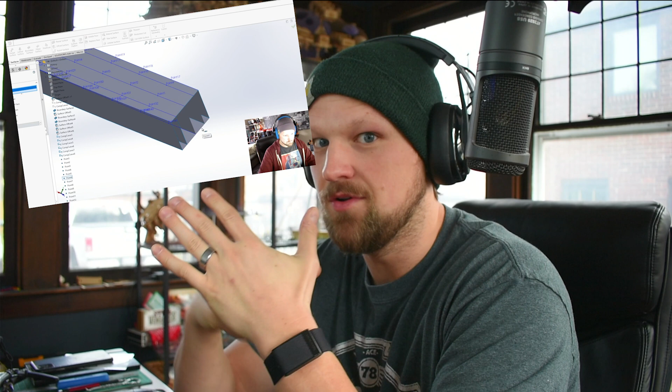If you've followed me for a while, like for 4 years, there's a video on YouTube, I'll link it in the description, of a pathetic dude spending 10 minutes to model a track piece and having to redo that multiple times. That's hilarious to me because I've learned a couple of new little tricks that we'll go over in this video on how you can enhance your design.

We're going to focus on a triangular track, since on the previous one I did the square box track in a totally different way, more heavy on Solidworks and not so much in the Excel setup. So this time we're going to be heavy on the Excel, and then we'll dive into how you can model it in a CAD program, and I'll be doing Solidworks. I think it'd be a lot of fun.

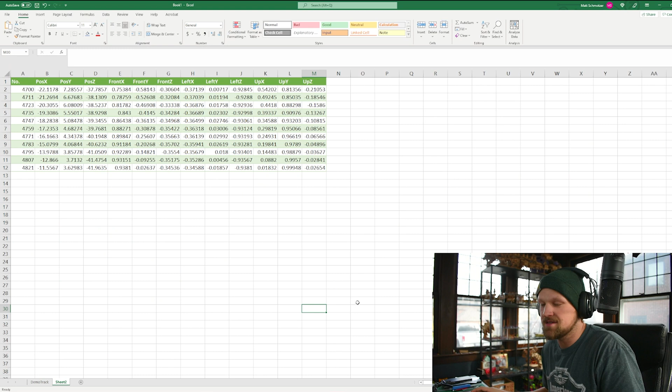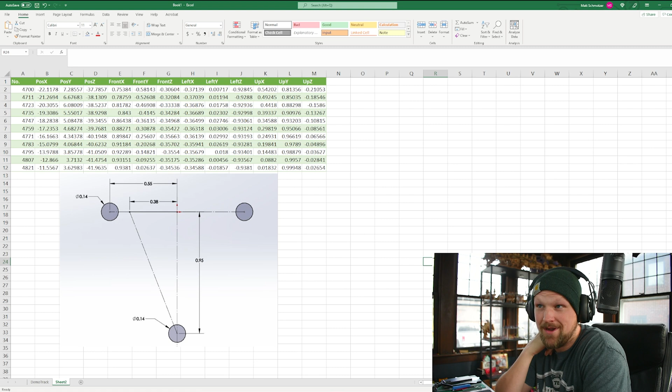We're going to dive right into it. As I said, we're doing triangular track, so I have a little diagram of what we're going to be going for today. This is all in meters. It's close, not perfect, but this is what we'll be doing. If you're going to go and model some track to be 3D printed to make a model or whatever, you can set it up whichever way you want. I'm just going to go over the procedure to set everything up, and then we will go from there.

So, like we've done in past videos, we're going to set up our rail gauge. And as you can see in this drawing, it's 0.55, so that's easy peasy.

Just like the previous video, this is gonna get kind of boring — you're gonna be like, dude, we've done this every single time, it should be the same. I'm just gonna go over it for the newbies that just came in, like, I really wanna know Intamin track, I don't really care about all your other videos, I don't have a half an hour or an hour to go and watch all those. So I get it, everyone's busy.

So we're gonna start with the left rail and the right rail. If I'm going too fast, go back an episode or two and we'll talk all about what we're doing here. For our left rail, for the X position, we're going to add our left X times the distance, which is half our gauge. We'll set that up and bring it over just like we've done before. If you've been following me for the past few videos, this is trivial.

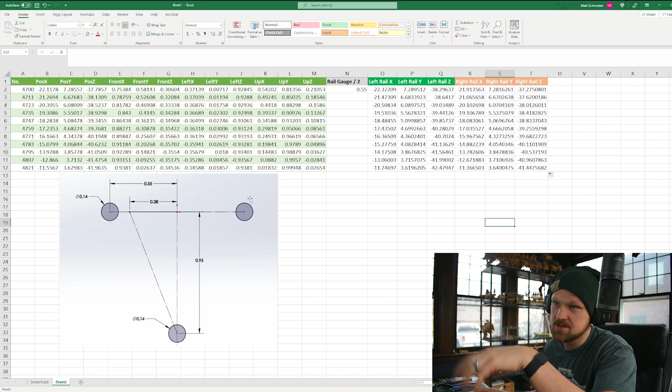Now we're going to do the right rail, same thing: X position, and we're going to subtract the left X times our gauge. Nothing new here, we've done this before, and I'm just doing this in Excel to visualize what's happening. You can program this in MATLAB or code it however you want.

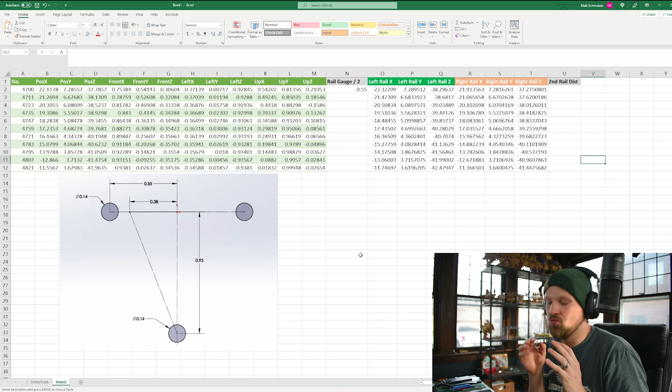Now we're going to start diving into where this gets a little different. We need to have what I'm going to call a secondary rail point. If you look at Intamin track, on these cross ties it doesn't actually go up to the rail — you can't use this same point, so we need to offset it over. I like to imagine it as a secondary rail. So do the exact same thing, you just bring it right over. The only thing different now is this distance is going to be different.

For this example, it looks like we have 0.38, so we'll set that, and then we will do our secondary rails. Let me grab our titles here — I just call it second left rail XYZ, and then we'll bring it over. It's the exact same equation, we're just grabbing our X, and the only thing that's different compared to our original left rail is now our distance is different because instead of 0.55, we're going to 0.38. That's the only difference there, and then we're doing the exact same thing.

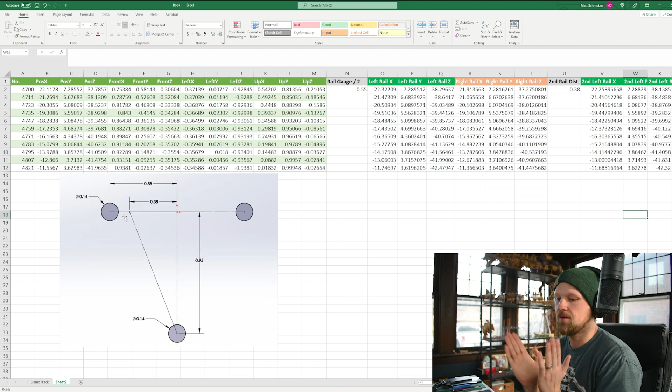So what we have now is the point where our actual running rail will be on, and then the point where we're going to connect the cross tie vertical parts of the triangle. Very straightforward.

Then we have to do it for the right side. Same thing, only now positive X minus the left X times this new 0.38 distance. We'll bring that over — everything should be pretty straightforward as of now.

Then we need just one more point for the bottom, the spine. Let's keep going over here — we'll call this spine. In my drawing that I sketched up in SolidWorks based off some Google images, I'm gonna go 0.95, that seemed pretty close. It might actually just be a solid meter, I don't know — talk to someone that worked at Intamin, or heck, this would even work for a Gerstlauer.

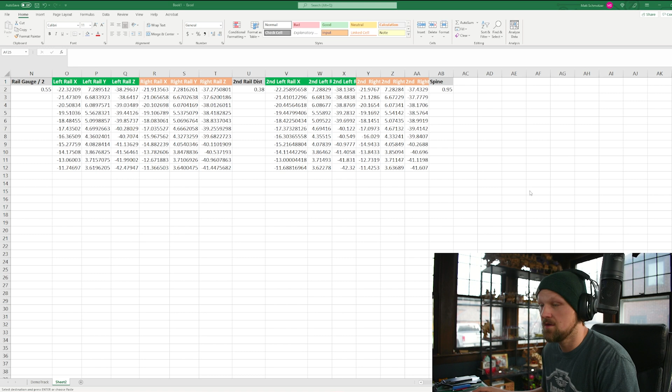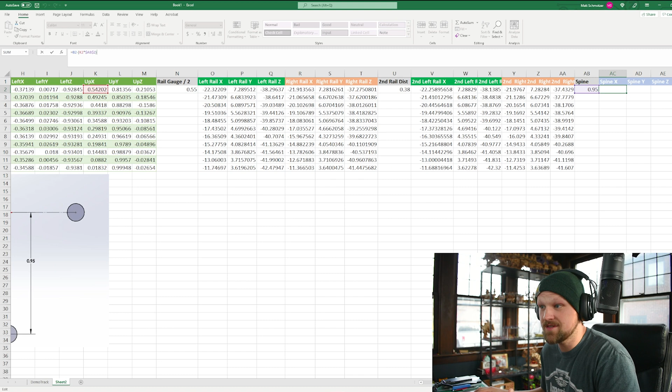You might want to change up a few things later on, but it's pretty much the same procedure. So, spine X, Y, and Z. You've done this before if you watched the last video, we're just going straight down. Let's take a look at the equation: positive X minus, because we're going down, the up X times whatever distance we said, which is 0.95.

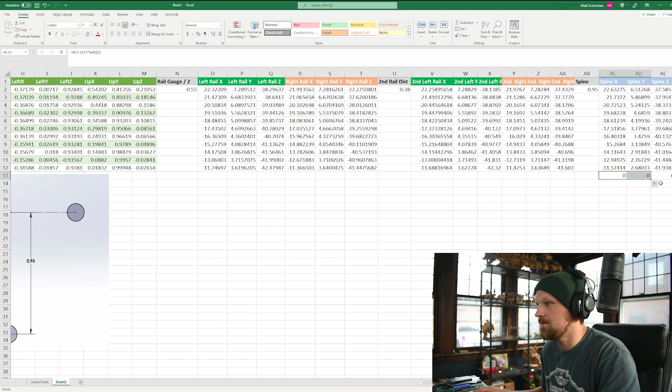Look at that. All right, and there we go. Bring it over, bring it down. Guess we don't need this last one.

So with that, you have now just programmed all the points, all the curves you're going to need to bring this into a CAD program. And that took, I don't know, a couple minutes. As you go through your entire track, you just bring it in and all the equations are set up. So it's really, really quick.

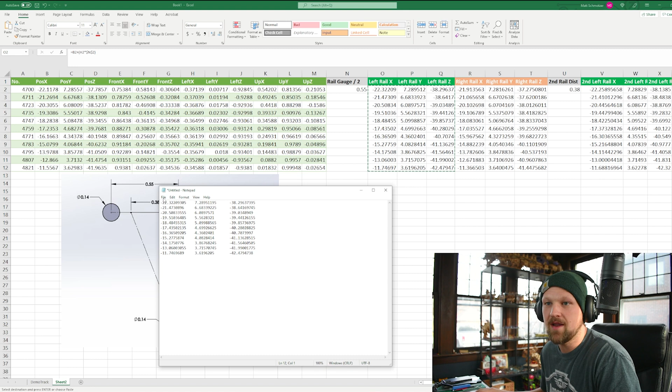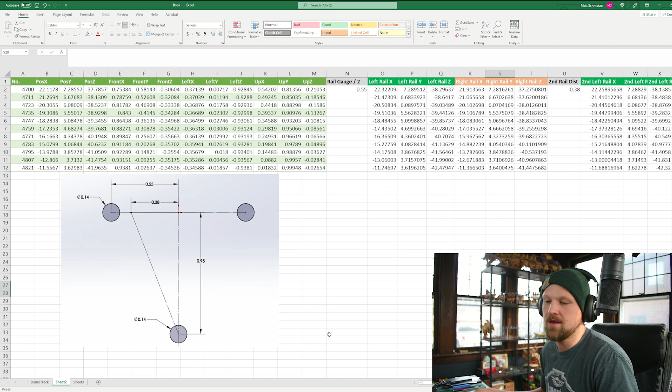Now, the next step to get it into Solidworks is you go to Notepad, grab your coordinate system like we've done before, put it in Notepad, save it as a text file. You can actually save Excel as a text file too—just bring it into a new sheet, put your points in there, and save it. There's other ways you can do that, but I've already gone and saved all these files for us. So let's just dive right into SolidWorks.

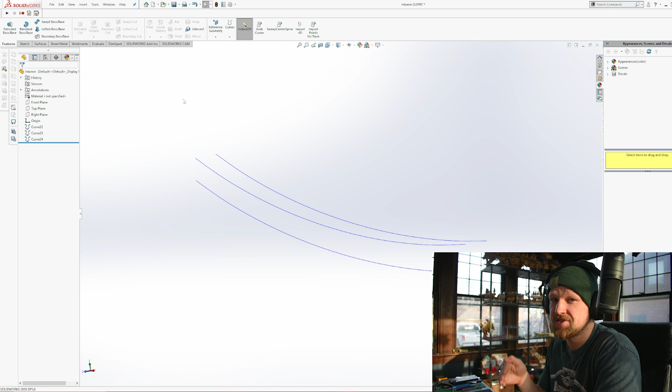Now that we're in SolidWorks, we can bring in our curves like we've done in the past. Like I said, I have a macro that we'll dive into in another episode, but all it's doing is bringing in these curves using what we talked about last time about how you can take your X, Y, and Z points and create a curve from those. So that's the left rail, the right rail, and our spine.

Then what we need to do is bring a point cloud in. The point cloud is basically our secondary, secondary left, and secondary right. Let's do that right now—bring in our points, and there you go.

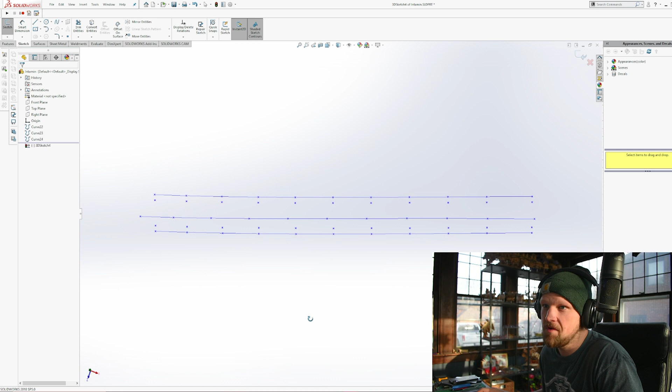We're going to use this to construct the triangular piece, basically the connector between cross ties. If you look at an Intamin track, on some of the older ones at least, there are square tubes that form the cross tie, and then there's a circular tube that acts as a cross tie connector.

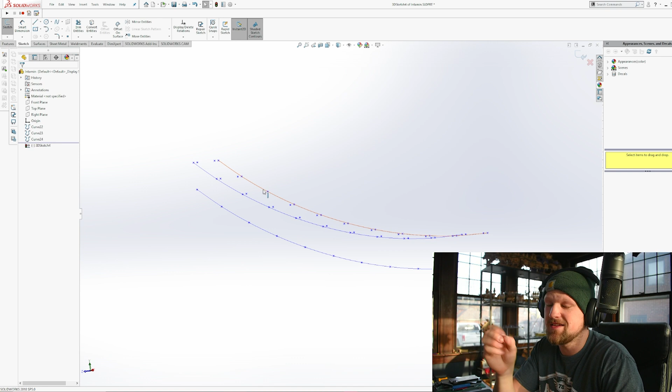So let's dive right in here. Since we're in a 3D sketch, we're just going to start making cross ties. There is a way to automate this by knowing which points are connecting each other, and that kind of takes the design to a whole other level. So let's just sketch this all out and then go from there.

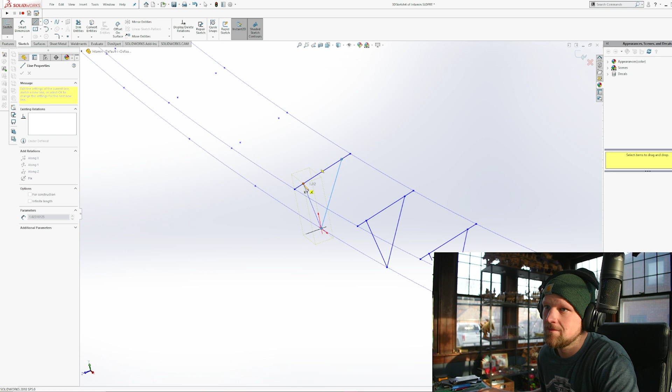All right, there we go. Those are the cross ties. So let's get out of the sketch—we're going to do weldments to create the cross ties, at least in this example.

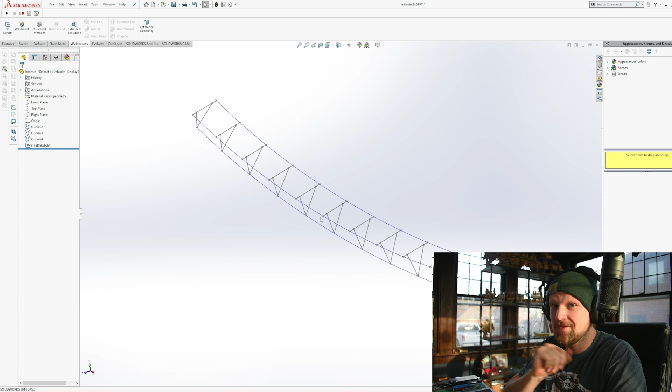Before, in episode 2, you saw me take a surface between the two curves and just pattern the cross tie. You can do that. This one's a little more prescribed to the Excel data that we had, so both ways work just fine. For this, you'll get a better result.

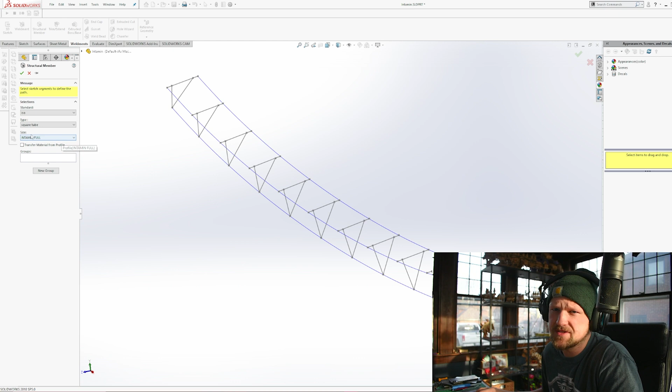So we're going to go into weldment, structural members, and I created a profile. If you go online, you can search how to make a weldment profile, but basically it's just my square tube—I just called it INTAMIN FULL. We're going to use this and just start selecting our cross tie.

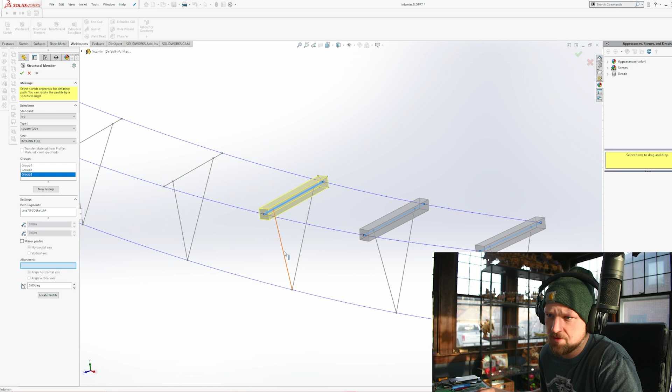As you can see, it'll load right up. What we'll do is just align it to these guys, go one by one, and make sure we get it all set up correctly. All right, there we go.

So now we have our cross ties, and then we're going to go and do the V's—similar way here. So we got our cross ties.

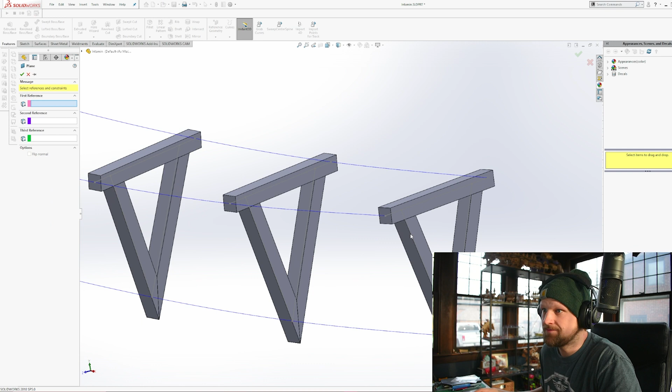Now what we're going to do next is a bit, I don't know, kind of up to you on how you want to model it. First, we have our cross tie that's at the beginning—it's obviously where the two track pieces butt together, so I'm just going to cut it in half. You can set it up however you like, but for this demonstration we're just going to cut this guy off, then do the same for the other side, and work from there.

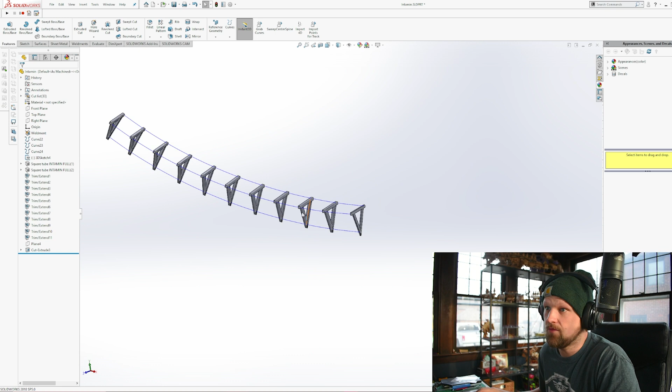So let's do the other one—just make a plane and cut it.

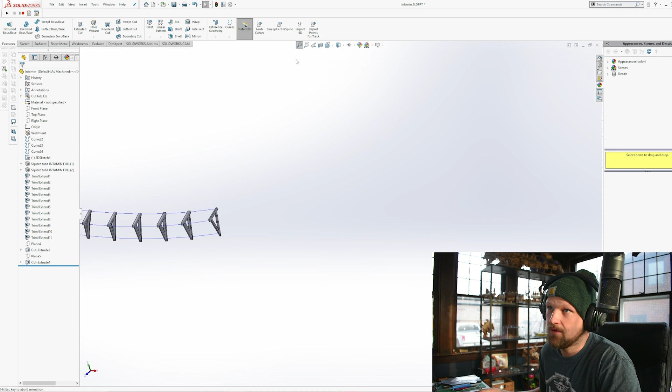What we're going to do is, like I said, this is kind of just if you want to go 3D print your coaster track and whatnot. So all we've got to do is make sure this is 3D printable, and that means you can do a couple things. You can make your bottom spine—let me center this—and then trim it as a weldment. That takes a lot of time, but that's the correct way, because then you can actually get the cut paths for all of your weldments.

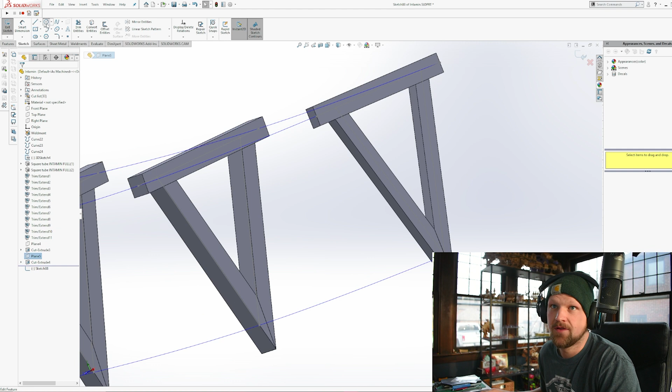But I'm going to cheat just a hair, and we're going to draw on this plane here. I said I'm going to cheat a bit, but let me show you what I'm thinking here to make this a little easier.

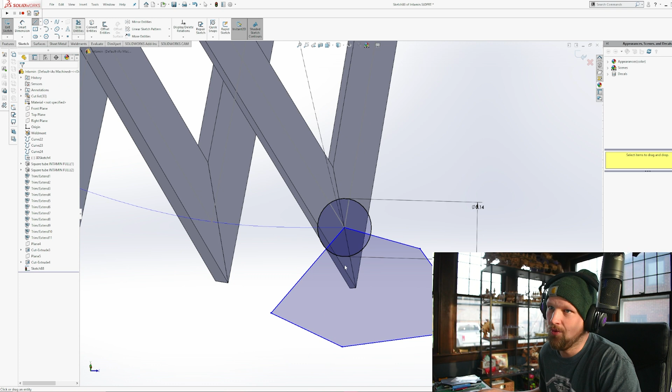So we'll grab our circle and we'll say what we said, it was 0.14, and right where it's kind of nicking off here, I'm just gonna make it a little bigger. This is the poor man's trim, as I like to call it.

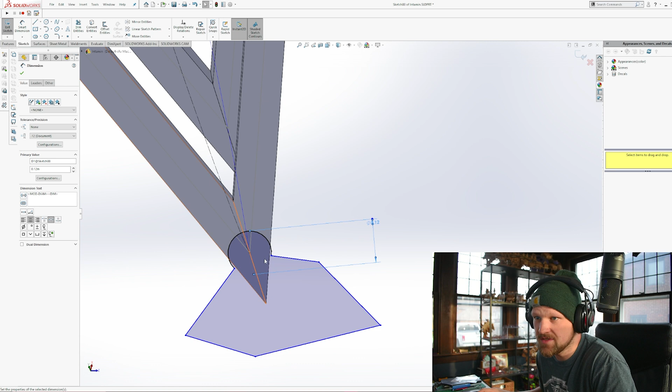We're gonna sweep this through and it should work for what we're doing. What you're gonna notice is you're gonna have to sweep it and then curve it, so in order to adjust for that we'll bring this down just a hair. We'll make this 0.12, that should still work, even if it rotates a bit we'll be okay. See how it curves a little bit? That's okay, and then we will trim it.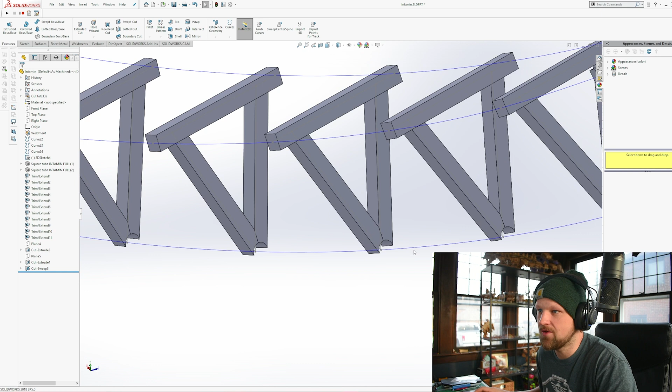There you go, so now these are all trimmed up to the correct distance, and now we can go add our rails in.

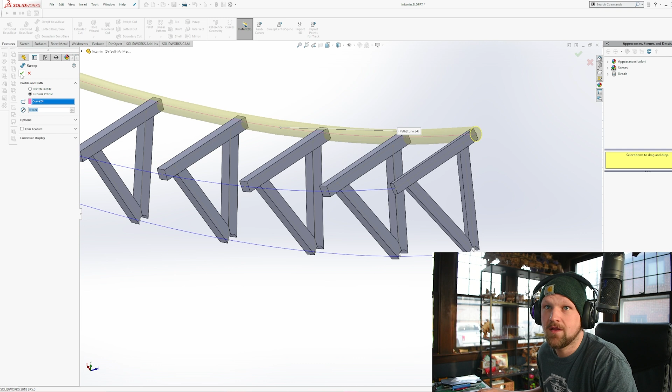Looking good. So we will do sweep, circular, 0.14 like we said. Next sweep, circular, 0.14. Bada bing, bada boom. Feature. Losing it. 0.14. Look at that, we are almost there.

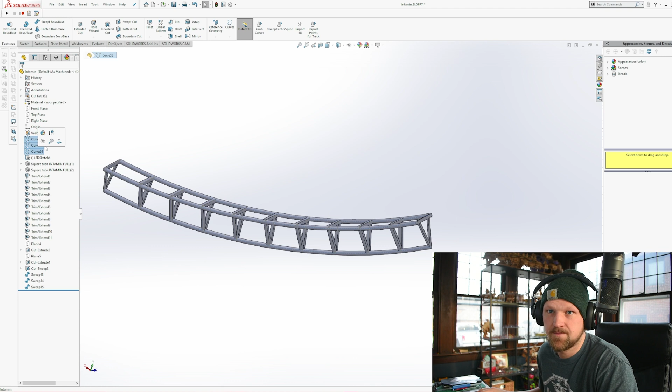Now let's just make this a little more visible. We can probably turn these curves off so we can see. We can combine everything so it looks beautiful.

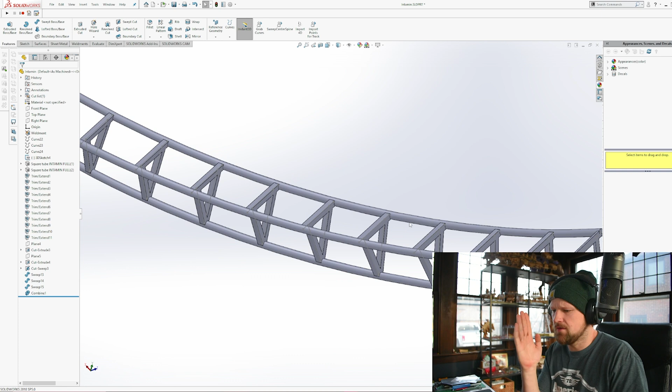All right, and now we can do the last thing. So on this type of track, and this applies to Intamin or Gerstlauer, there's circular tubes that go either in a zigzag, or sometimes even it's just same parallel cross ties. So let's just go ahead and model.

I'll just do, I don't even know, let's make it correct. I think if we do it like this, this is actually how they look.

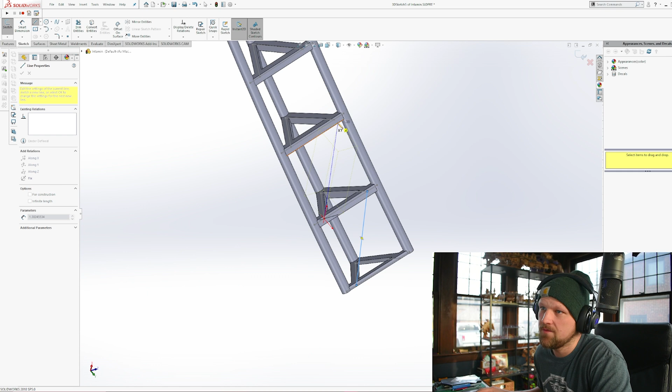All right, now we got our sketch. I think what we'll do is actually go back into this and we're just gonna connect the rest before we go and attach everything. So we should be able to go like this.

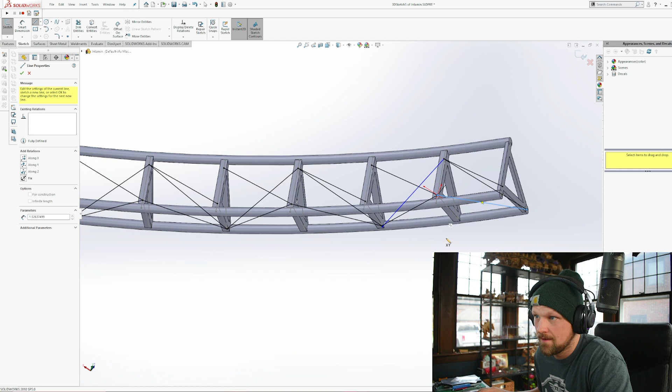There you go. Oh no, I got one floater out here, let's fix that guy up really quick. All right, there we go, we got our track set up.

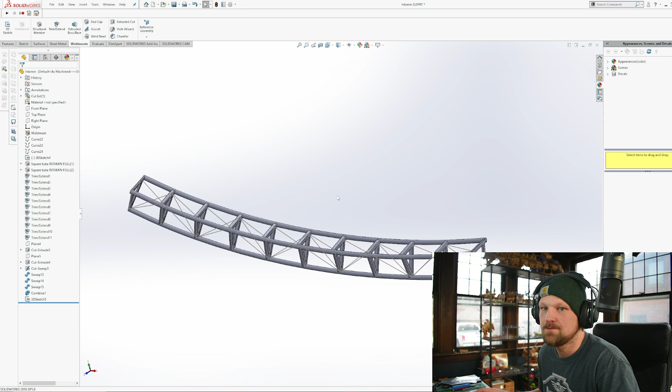All right, now that we got the sketch done, we should be able to go into structural member and our weldments, and then just like before, we will just start selecting these guys as the pipe. I should be able to do one side and then the other. So let's just kind of hide this.

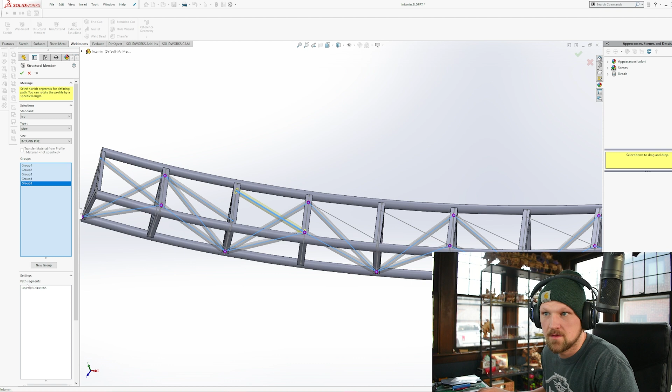Looks like some pretty cool track right there, eh? And then just hide this sketch. There's a couple little bits of cleanup we got to do, so we'll go back to plane 5 here.

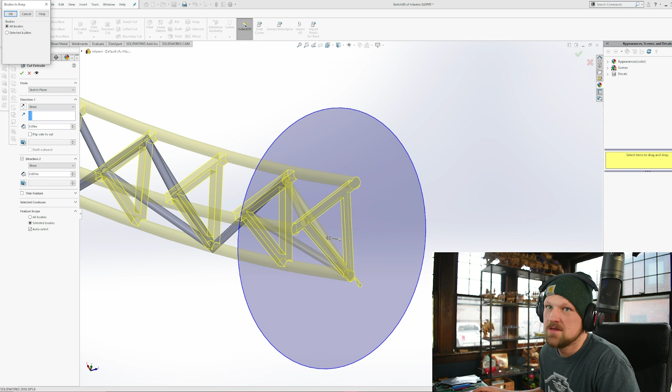Like I said, if we just need this to butt up, we'll trim this guy. We'll go this, trim it. Maybe we'll go the second direction by just like 0.001, something itty bitty to clear it up. Oh, I need to go further, my bad, way out there.

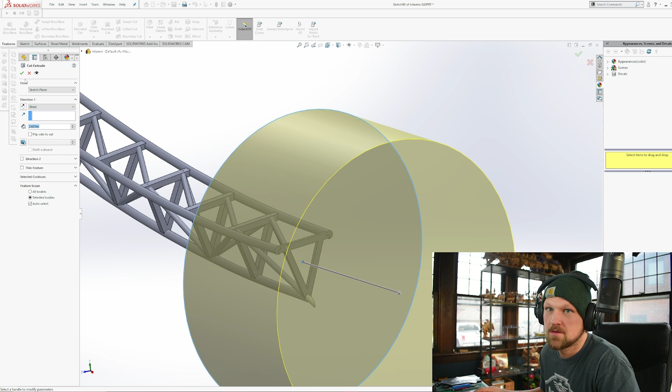Beautiful. And then we'll do the same on the other side, just trim this guy up. Bada bing, bada boom, that was pretty exciting.

I think it turned out really good. You can do a lot more from here. You can go and add supports, you can add the bosses that connect everything. It looks kind of wonky, but it is straight on the plane.

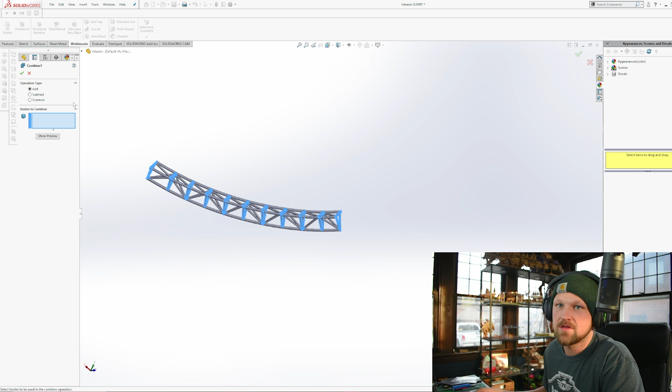Oh, I didn't combine it, so we'll just combine, insert features, combine. That just kind of unifies everything. Let me grab everything, see if it fixes that. So, okay, there we go, so now it's one face.

So yeah, thanks for joining me. This is Intamin Track. Next time we'll see what other cool things you can do with NoLimits data.

You can do anything, there's no limits. It's awesome, they got the name right on that one.

And bringing this into a CAD environment is really straightforward. You just have to be methodical and then set it up so that you can go through every track section that you created and bring it in and do whatever tweaking you need. So this is just another example of some of the cool things you can do.

Last time we just focused on curves and adjusting our guide rails. This time we're kind of focusing on point clouds and how you can just bring in all your points and use those points to sketch. And then next time we're gonna do some more track design that uses some other methods. So every video is kind of repetitive with the setup, but I want to show you something unique every time, and I think that's valuable.